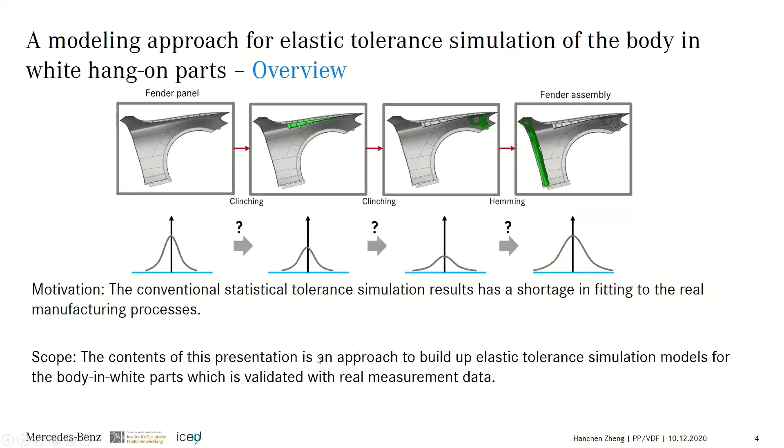So, as the state of the art, here is a comparison between 3 existing approaches that are popular and applied in the automotive industry to simulate the tolerance behavior. First, we have the FEM simulation approach for the nominal condition or some extreme conditions. With this approach, the user is capable to simulate the flexible parts, and we can obtain the simulation results for every mesh node and element.

However, the modeling process and also the calculation process of FEM can be very time consuming, especially when we're dealing with some very large models or the models with very complex and complicated geometries. Maybe sometimes it will take like days to get a single result. And also the part tolerances are usually not considered because we only change the boundary conditions. We don't consider the tolerance distributions of the parts.

So besides, we also have the rigid tolerance simulation, which has a relatively simple and fast modeling process. But as mentioned before, the simulation results do not fit to the reality when dealing with the compliant parts and also considering the manufacturing processes.

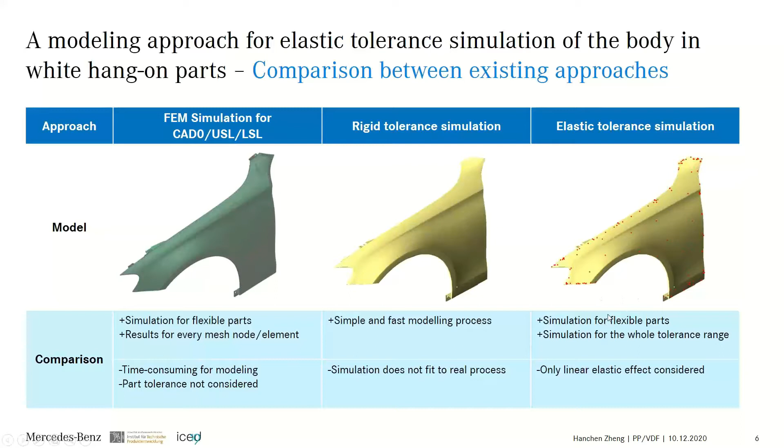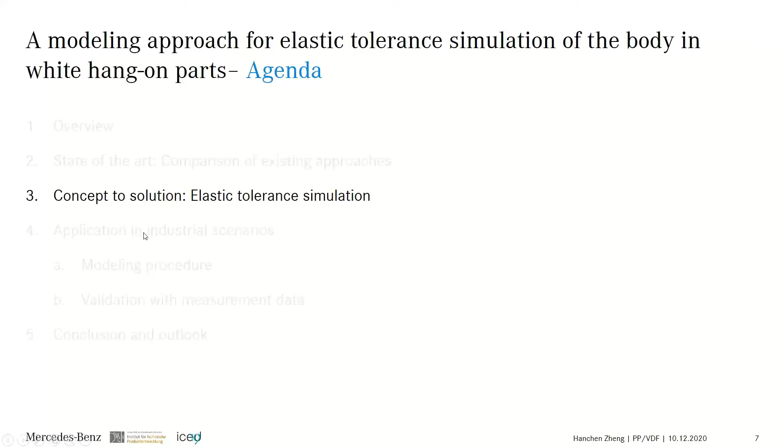Okay, now I would like to introduce the concept to create the elastic tolerance simulation model. In order to create the elastic tolerance simulation model, we should first build up a rigid tolerance simulation model. The modeling process, I think, is quite familiar to most of us. We're starting from the CAD geometry. We can export it from the data bank and use a DCS converter to convert different formats of geometries to the format that can be processed by DCS.

And then we integrate all the necessary information like the points and the tolerance data and also the measurement strategy into the simulation model so that we can get a point-based rigid tolerance simulation model. So based on this model, we can start our process for the elastic tolerance simulation model. We need to link the FEM information to the rigid model so that all the compliant parts in the simulation system become deformable.

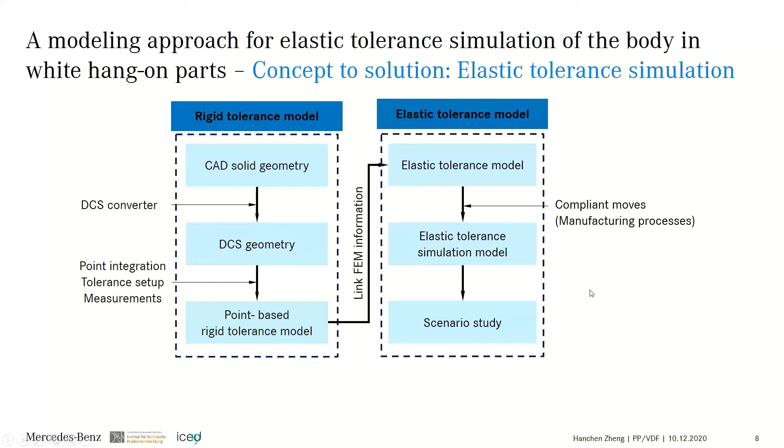And then we need to define the compliant moves according to the manufacturing processes so that we get an elastic tolerance simulation model. And this simulation model can be used for different scenario studies. So as we see here, there are two important steps to build up the elastic tolerance simulation model, which are to link the FEM information and to determine the compliant moves. Therefore, I would like to introduce a little bit more detail about these two steps with the example of a fender assembly, which is simulated in this work.

So the first important step is to link the FEM information. I assume that we already have the rigid tolerance simulation model with all the necessary DCS points defined in the model. Then we will need to import the FE meshes for every single part in the model together with the corresponding material information into DCS.

Then 3DCS will automatically search for the nearest FE node from this DCS point and create a group of these nodes. In the end, 3DCS will generate a new mesh file with a group of these DCS nodes and an extra reduced stiffness matrix file where the stiffness information corresponding to these DCS points will be recorded. And this information will be used for the creation of the

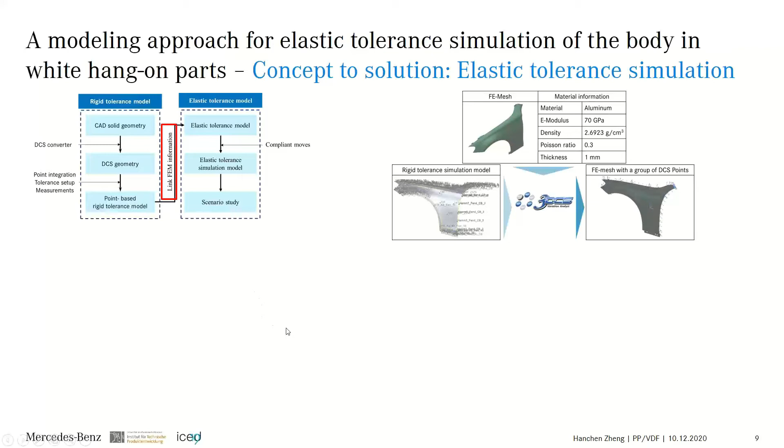elastic tolerance simulation model. So the second important step here is to determine the compliant moves. As we see here, the fender body in white system in this work consists of the body in white, the fixtures and also the fender assembly. The fender assembly itself consists of 4 single parts: the panel A, the support part B, a reinforcement part C, and another support part D.

So all these single parts will be joined together by following a specific joining sequence. As we see here, the support part B will be clinched on the panel A to form the sub-assembly, let's say AB, and then the reinforcement part C will again be clinched on the sub-assembly, and finally the support part D will be joined with the sub-assembly through the roller hemming process.

So DCS provides different types of compliant moves to simulate different types of manufacturing operations. In this work, I assume that two parts are firmly joined together after the joining operation, and no relative sliding occurs between parts, because in the roller hemming process there will be some adhesive material between the parts, and during the process these two parts may slide relative to each other, and this nonlinear behavior will not be considered in this model.

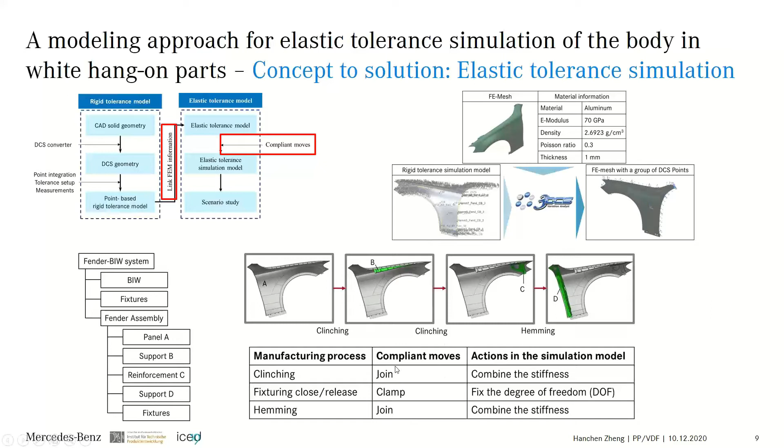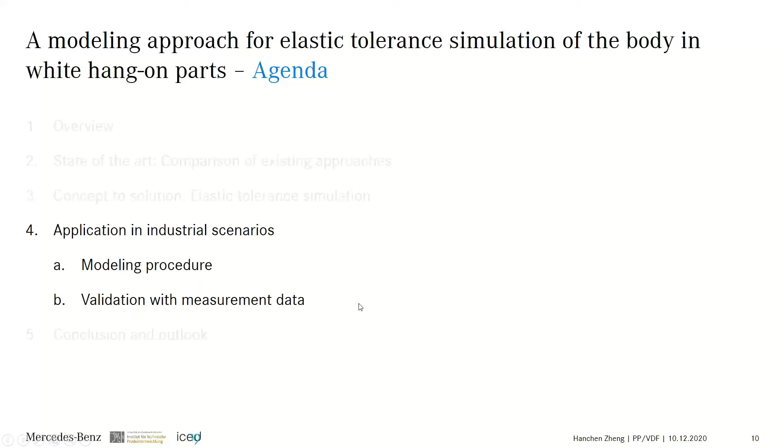Okay, now we have a general understanding of how to build up an elastic tolerance simulation model and some important setups in the simulation model specifically for this work. I would like to introduce the application of this concept in industrial scenarios. I will start with the modeling procedure and then show the comparison between the simulation and the measurement.

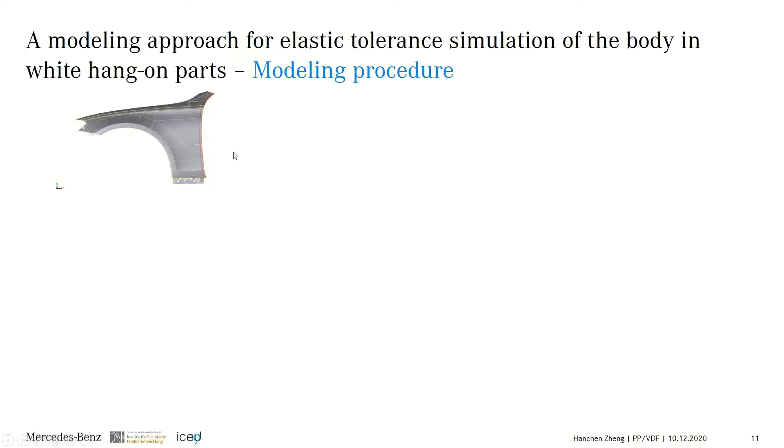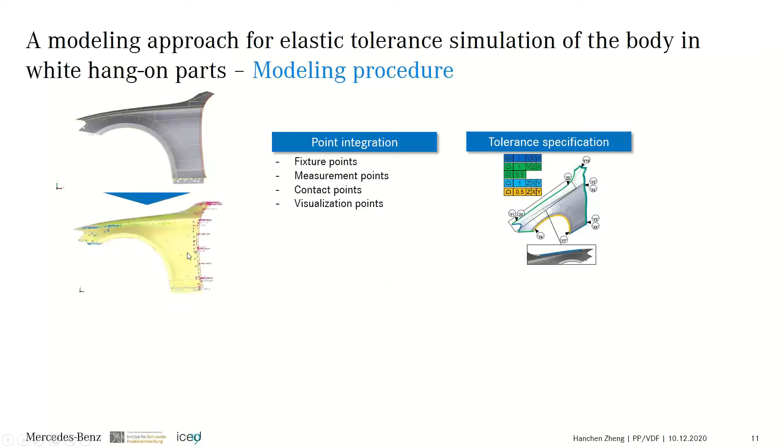So first we have a CAD geometry and import it to DCS, and then we integrate the necessary points, which are here the fixture points, the measurement points, the contact points, and I've also used some extra points to create a better visualization of the results, but this won't have any effect on the simulation result. Then I define the tolerance according to the tolerance specification for every single part, so that I get a rigid tolerance simulation model. But we want to create an elastic tolerance simulation model.

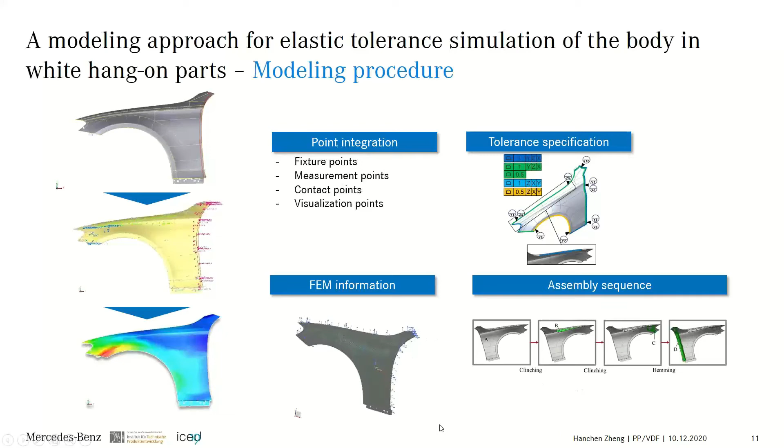Therefore, I link the FEM process following the steps I mentioned before, and also I define the assembly sequence, or here the joining sequence, by using the compliant moves, so that finally I get the elastic tolerance simulation model for the fender. And this model is used for two different scenario studies. Okay, now I'm going to show the description of these two scenarios.

So in the first scenario, the fender assembly is clamped on a measurement frame after the joining operations at this fixture position. And in the second scenario, the assembly is bolted also on a measurement frame, but at the same positions as it is on the body in white. In the real assembly process, the best fit method is used to put the fender in a proper position before mounting it to the body in white.

So in this best fit process, the gap and flushness in Y direction will be first adjusted, which means the gap and flushness between the fender and the bonnet. Then the position of the fender will be adjusted in the Z direction, so that the fender fits to the longitudinal beam of the body in white. And finally, the gap and flushness between the fender and the front door, which means in X direction, will be adjusted.

Therefore, a deviation in X direction of the fender assembly is usually observed, especially in the bottom area, and this deviation may lead to a deformation in the front area. So in order to verify this phenomenon, I defined a deviation of 2 millimeters in both simulation scenarios, as a kind of worst case. And I define the measurement point in the front corner here to verify the phenomenon, and also for the comparison of the simulation and the measurement.

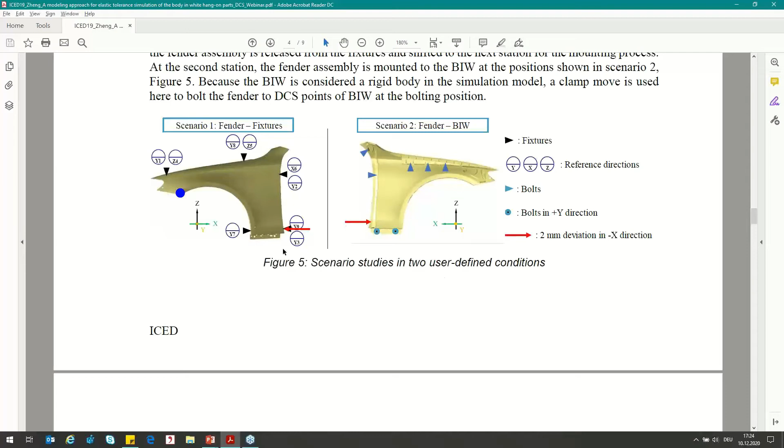Okay, so now we have these two scenarios, and let's take a look at the simulation result first. So in this picture, we can see the simulation results which I exported from DCS. This is the result for the MPY, which means the measurement point in Y direction. It's located here in the front area, as we see in the picture, the blue spot.

So we can get a histogram of how the assembly deviation looks like, and we get some statistical results like here. From 3,000 simulation runs, and by considering the compliance moves and the deviation I gave to the system, and also the tolerance, we will have a mean value of minus 2.82 millimeter in Y direction. So I'm using the car coordinates. So minus Y direction means normal to the outer surface of the part.

Besides, we also get the other statistical results like the standard deviation or 6 sigma and the estimated range, and also a list of sensitivity analysis. So in this case, we see that the tolerance that affects the assembly deviation in the first place is the tolerance from the fixture here. It makes sense because this position is actually also quite close to the measurement point, and there are many other tolerances that are making a difference, but it seems that the fixture tolerance here makes the most contribution.

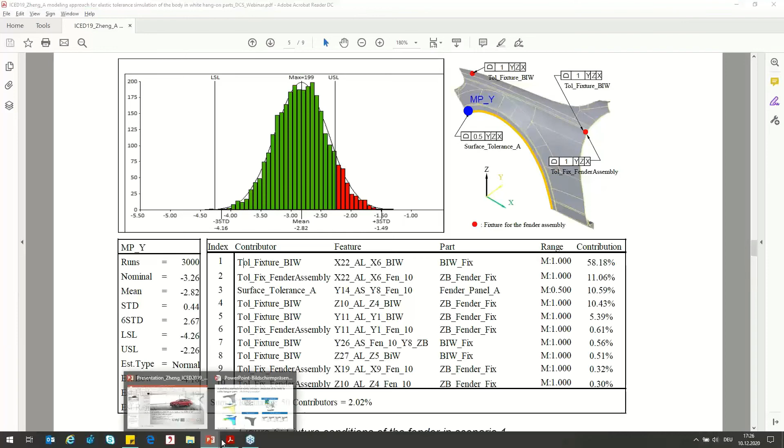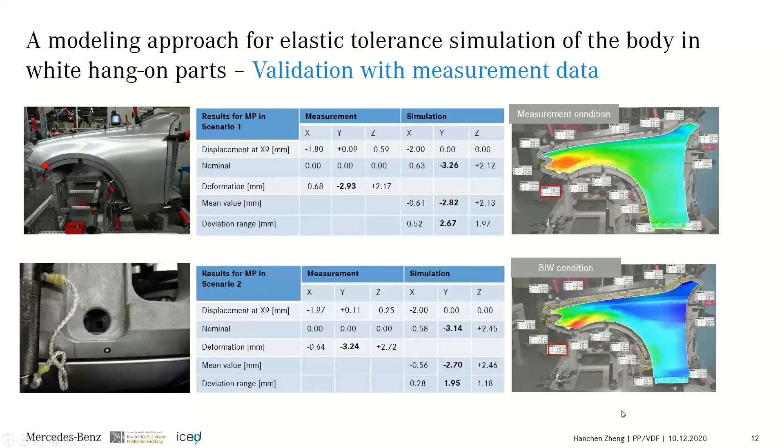So finally, we come to conclusions and a brief outlook. An approach is developed to implement the elastic tolerance simulation for compliant assembly considering the manufacturing processes. And the proposed modeling approach is applied in an industrial scenario, the fender assembly, and validated by real measurement data. As an outlook, in the future, an automatic integration process of the points from the CAD model to the simulation system may be developed, and it can definitely speed up the modeling process.

And a simulation system containing more compliant parts can be created, so that we can get more realistic results. And also maybe the nonlinear effects of the clinching and hemming process can be integrated in the simulation model, which improves the simulation accuracy again.